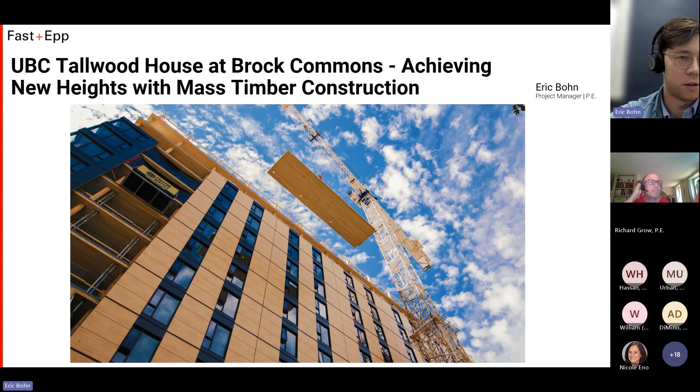Fast+Epp. We are structural engineers. I'm in the New York office. We have offices headquartered in Vancouver, Seattle, and Toronto, with 2 offices in Germany. We work with all materials in all sectors, but our expertise comes in timber and hybrid structures.

Here's quick bullet points of our specializations, and I will highlight these 4 highlighted ones in red at the UBC Tallwood project.

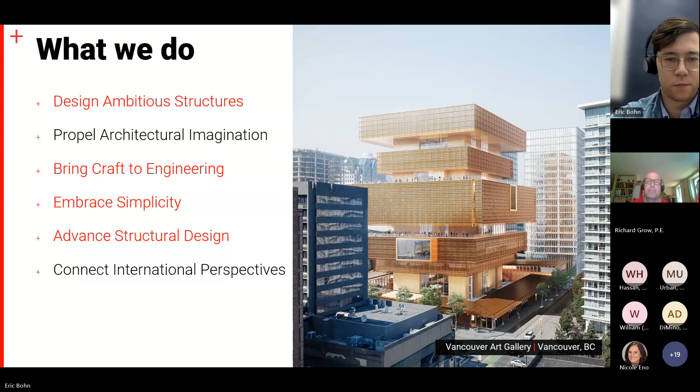Now to get into the project background. This is an 18-story student housing at University of British Columbia, Vancouver. It's 175 feet tall. It's 17 floors of 2-way point-supported 5-ply CLT. At the time, this was the largest application of point-supported CLT on a project in the world. It has a steel roof, all coming down on a concrete podium, transferring out on level 2. The lateral system is 2 full-height concrete cores. This was built in 2017, so before I joined Fast+Epp, but this has been a template landmark project at our company for future point-supported CLT projects that we've worked on.

A little quick mass timber refresher. This might be new to some people, or they might already know this. Cross-laminated timber, on the left, is a solid engineered wood panel consisting of several alternating layers of dried lumber boards bonded with adhesives to form a solid panel.

The CLT panels consist of odd layers, usually 3 to 7, with the outer layers going in the strong axis and the inner layers going in the weak axis.

Glulam is a stress-rated engineered wood panel, consisting of wood laminations, or lams, bonded together with durable, moisture-resistant adhesives to make a solid member. Glulam was used for the columns, and CLT was used for the slabs.

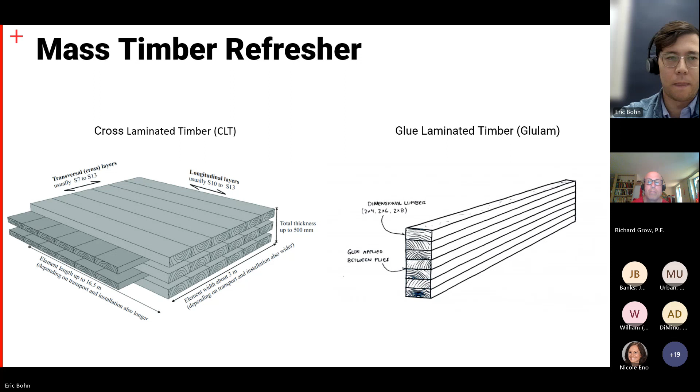Here's a brief timeline of the project. What I want to highlight is between December 2014, when the design team was selected, to October 2015 - this 10 months was the full design phase, so it was very quick.

The client had a very quick timeline for design and construction because they wanted it open for fall 2017. Once design was done, construction started in October 2015, and the superstructure portion was done less than a year later, ready to open less than 2 years from when design was completed.

I want to highlight that the design phase included site-specific regulation and code compliance that we had to work around, which I'll get into later.

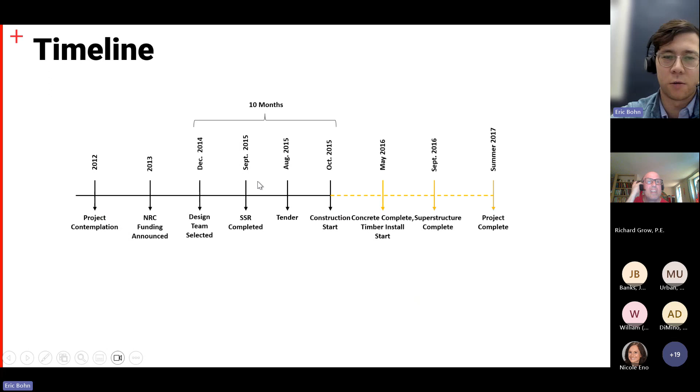This was possible due to external funding in Canada, mainly through Natural Resources Canada. This was because there was strong interest in promoting the wood industry in Canada, not just for sustainability but to build tall buildings - Canada wanted to be at the forefront of tall wood structures in the world. Following this, more funding followed in both the US and Canada.

Now I'll get into more design context for the project. It's located on the peninsula just outside of Vancouver - you can see Vancouver in the distance here. This is the campus of the University of British Columbia, and right here is where the project is.

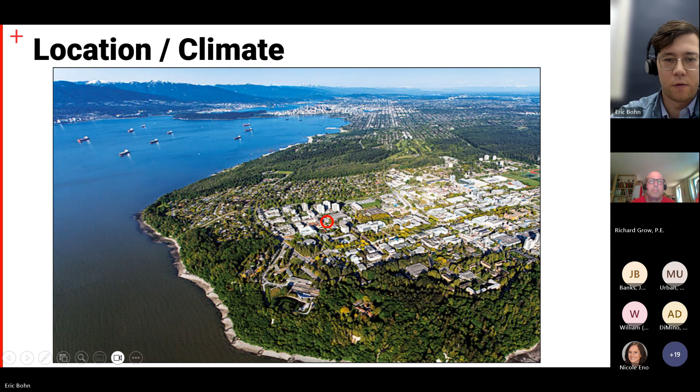It's on a hill close to the ocean, so you get wind loads from the escarpment, producing very high wind loads. It's also close to the Cascadia subduction zone, so it's a high seismic zone - in Canada, this is the second highest seismic zone after Victoria.

Being part of the Pacific Northwest, there's a ton of rain. This might not impact steel and concrete as much, but since timber is an anisotropic material that absorbs moisture, lots of rain can really affect timber's mechanical properties and its aesthetic properties.

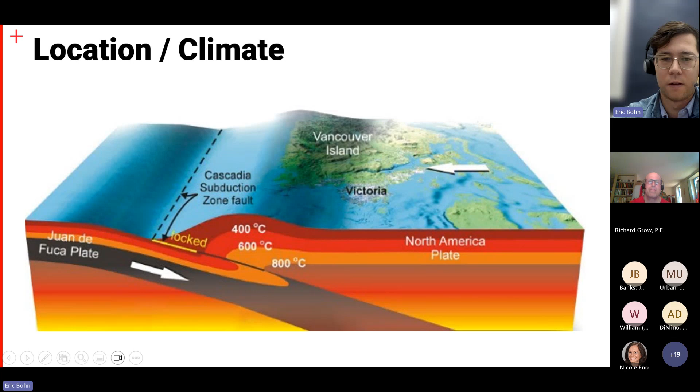The university had a building they liked - another student housing on campus made out of concrete - and the cost was $192 per square foot. So they came to our design team and said, we want student housing made of timber at this cost, $192 per square foot. From day one, this was really a driver to keep the cost at $192 per square foot.

For a unique and new project like this at the time, you had to find alternate ways to procure and go about the project - so not design-bid-build, but rather design-assist. It was very important to bring in suppliers, installers, and the GC during the design phase to get real-time feedback through design assist.

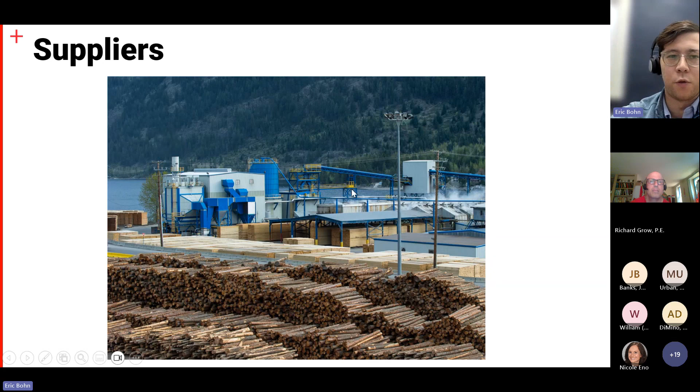British Columbia has a strong forestry industry with lots of supply, but at the time it mostly looked like these dimensional lumber mills. So at the time, there weren't many fabricators or producers for mass timber in British Columbia.

When considering suppliers, we needed to think about production capacity. Do these shops have enough output capacity to produce the volume of wood? Do they have the species that the design team is looking for? Do the panel dimensions fit the requirements of the project?

As a starting point, this is a rule of thumb we use at Fast+Epp for mass timber buildings, for post and plank, meaning beam, column, and slab: 0.25 meter cubed of wood per meter square of floor. Multiply that by the total area of the building, and the estimate was about 3,640 cubic meters of mass timber for this project.

The other thing to consider is the supplier's capability. Are they capable of producing a high quality product on schedule, and how long will it take? Today many mass timber manufacturers are backed up 6 to 8 months. You need to reserve your place in line, similar to a steel mill order. The design team knew CLT was a critical path and needed the suppliers to deliver.

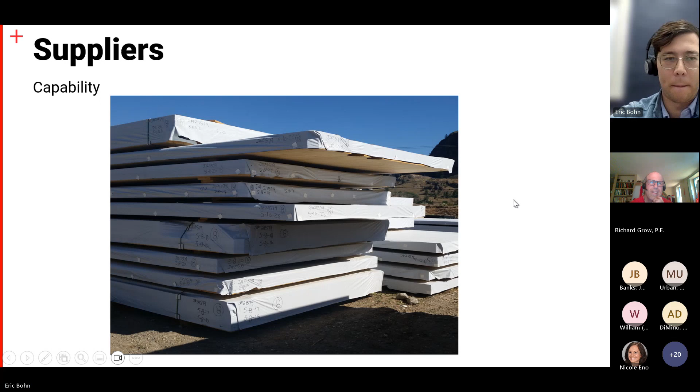Now on to design approach.

Keeping it simple was the overarching design approach for both this project and what we do at Fast + Epp. This was especially the case here because of the limited budget and accelerated design and construction timeline. The design team didn't want to be purists and force timber if it didn't make sense for cost and timeline of design and construction.

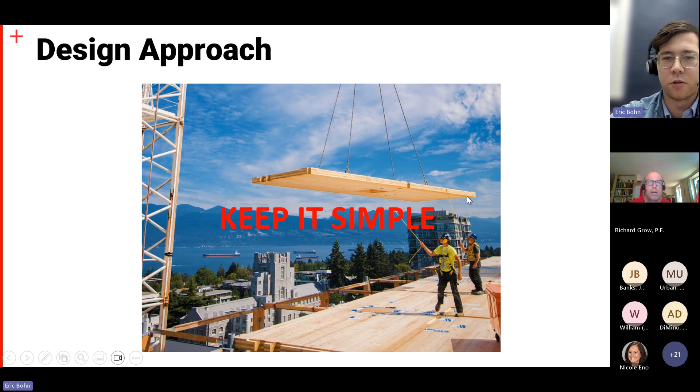Our design team wanted a flow and repetition of structural elements to facilitate fast construction. And since our design team was already being innovative with this being the largest application of point supported CLT, we didn't want to be too innovative beyond that.

With any design, you start in concept with multiple options. These were all the options explored early on, with 3 investigated in much more detail: 2 post and beam options and 1 flat plate point supported option. These 3 went through preliminary costing and discussion, and we decided on the point supported system.

Now we'll go into the building overview. This is the structural model. You can see the steel roof over 17 floors of point supported 5-ply CLT, supported by glulam columns. This all transfers onto a concrete transfer slab on level 2, with standard concrete pad foundations.

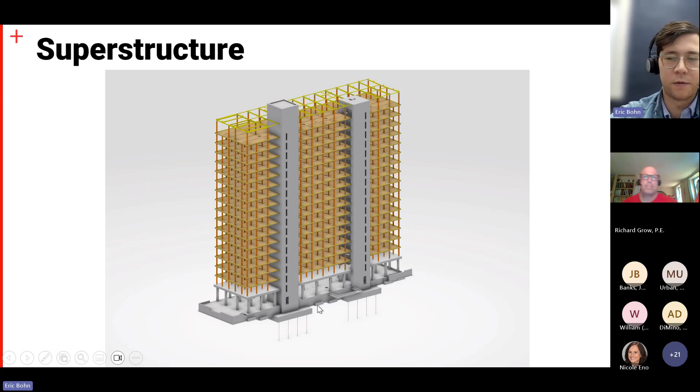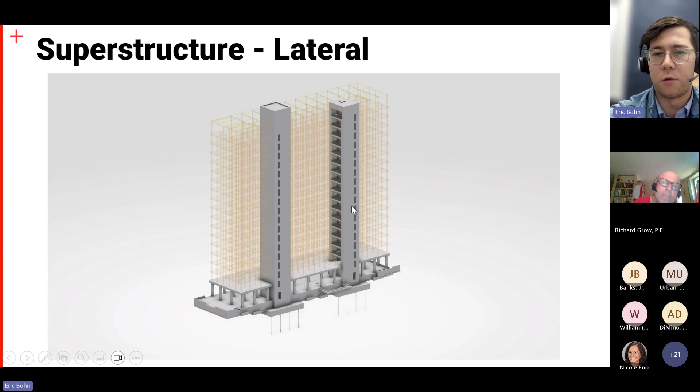The lateral system is 2 full height concrete cores designed as ductile reinforced concrete walls. A lot of people ask, if you're making the gravity system mass timber, why not make the lateral system mass timber too? In this high seismic zone, it was actually technically feasible to do a CLT core wall. However, the client didn't have the appetite to invest the resources or time in seeing if this would work, so we went back to our keeping it simple approach and just kept concrete core walls. Our design team also didn't think we would get approval from the site-specific regulation if it was CLT cores on top of point-supported CLT.

Here is a rendering highlighting all the timber elements. As you can see, this is a majority of the building.

This is the architectural layout. We have 2 quads at the ends, and this is an isolation view of the quad unit. In between the quad units are multiple studio units, shown here in isolation as well. Working with this layout, we typically wanted the short distance between columns to be the panel width in the demising wall.

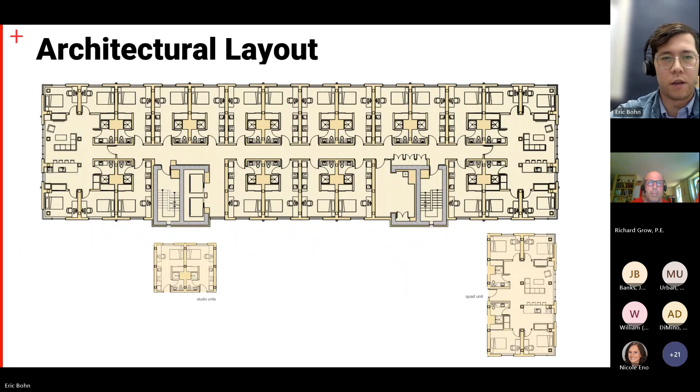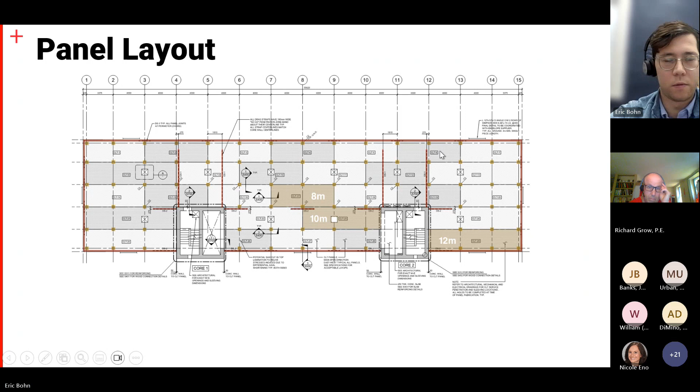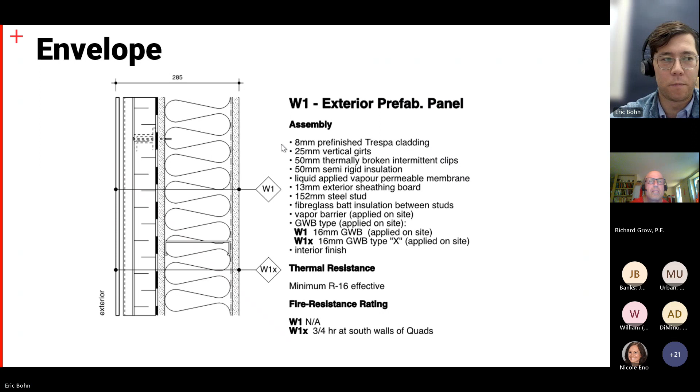Now I'll get into the key analysis and design challenges our design team faced. As I mentioned earlier, due to the height limitations of the BC 2012 code limiting buildings to 6 stories, we were out of code with this. However, UBC is a unique single legal entity that allows it to essentially operate as its own small municipality.

This allowed the design team to go to the British Columbia Building and Safety Standards Branch and create a site-specific regulation, SSR, which is its own document for this specific site and project, interpreting the code to make an exemption for this site. Our design team drafted a document called the UBC Tallwood Building Regulation, which ultimately exempted this project from the BC height limit.

However, this required an extensive peer review process from structural engineers, fire safety engineers, building officials, timber scientists, and construction specialists to determine if this was acceptable. This was our path to finally get the building permit, and it was all done within that 10-month design period.

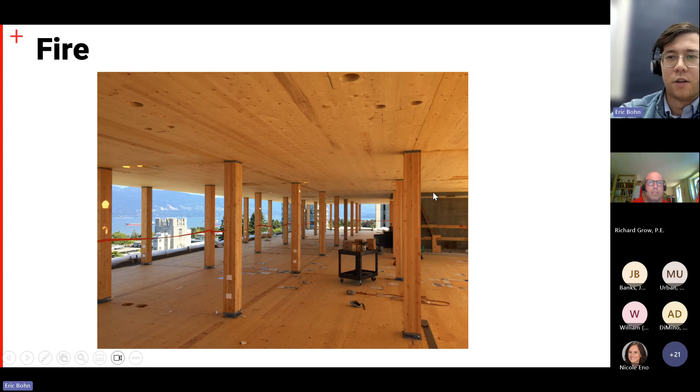Now I'll get into the details about the fire aspect of mass timber. A lot of people ask, you're making a building out of mass timber, why not expose it? However, the design team had to go and cover it up, and I'll explain more about this.

In order for our design team to get approval from the province, they thought it wouldn't be possible to push through point-supported CLT as an innovative step while also having everything fully exposed, especially given the knowledge, research, and fire codes for mass timber back in 2014. So our design team decided to use drywall for full fire protection, which was a conservative approach to get code compliance approval. Obviously, many years later, the code has caught up and can now design for exposed wood. This project was a big catalyst for that.

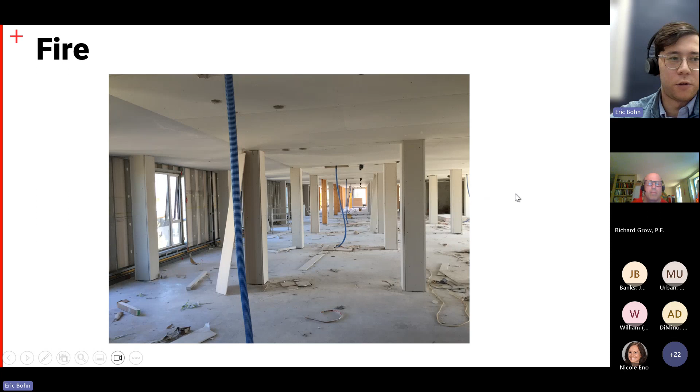I'll do a quick side note about how to design for exposed mass timber. It's through an established method called charring, where mass timber elements burn at a predictable rate of 1.5 inches per hour, creating a gray char layer around the unburned portion of the wood. You design an exposed wood element with a reduced char section for the fire hourly rating of the building.

Our design team didn't do this, as I mentioned before. If you do it this way, you need to pay more for the columns due to the increased thickness needed to account for the reduced char dimension. So instead, our design team wrapped the columns with 3 layers of type X gypsum. The benefit was that it allowed smaller section sizes for the columns and the use of non-visual grade wood since it would be covered up.

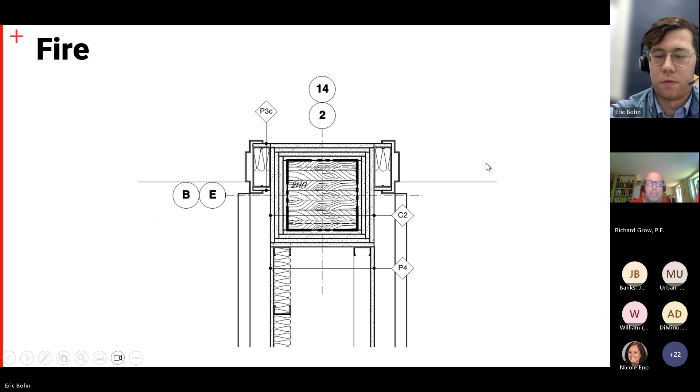Here's the typical floor assembly of the project. Starting from top down: floor finish, concrete topping. This concrete topping was more of an acoustic layer, and today it can also be used as a fire separation layer. Below that we have our 5-ply CLT, then our moisture resistant partition, GWB type X board, followed by a hat track, and then 2 more layers of that fireproofing GWB type X. That's for the 2-hour fire rating.

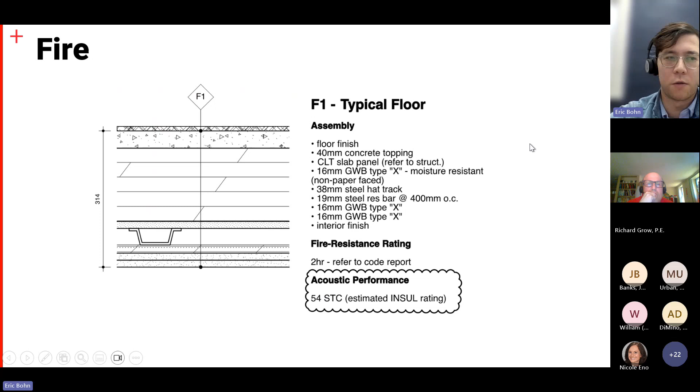Now I'll get into the details of the point-supported CLT system. This is essentially the gravity system: 5-ply CLT spruce panels on glulam columns from Structurlam in British Columbia. This was the largest application of point-supported CLT at the time, and it's very efficient, similar to concrete flat plate, because there are no beams, thus no horizontal obstructions to MEP. This keeps the floor-to-floor thin and saves on envelope sizes.

Similar to concrete flat plate, CLT can span two ways here. In the long direction, this is the strong axis direction of the CLT, and the short direction is weak axis spanning with transverse layers. So it's very analogous to concrete flat plate, as I mentioned.

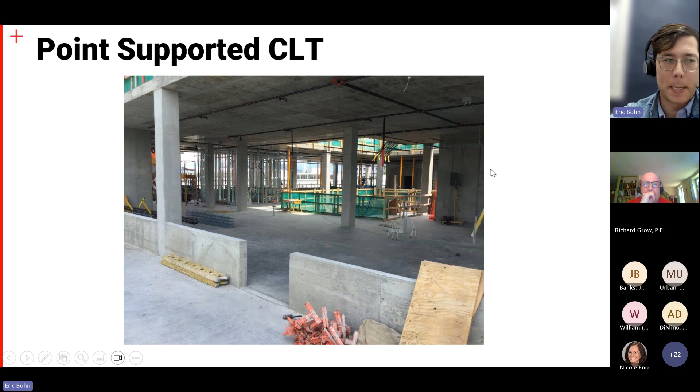A key design aspect of concrete flat plate is punching shear, as many people know. Similarly, in point-supported CLT, design is governed by a phenomena called rolling shear. This is where the wood lamellas try to roll over each other. Imagine a stack of straws on top of each other, and as you try to shear them across each other, the straws in the back try to roll over the straws in front of it.

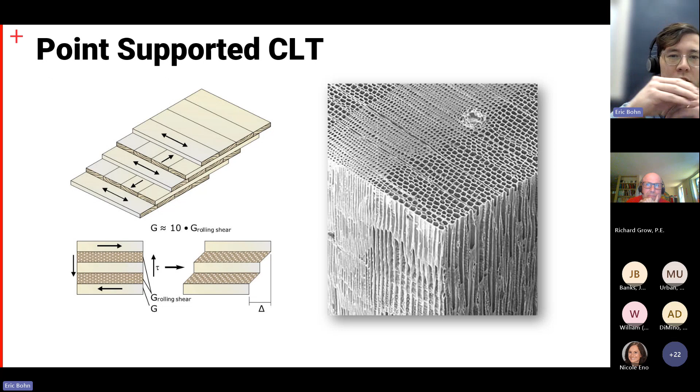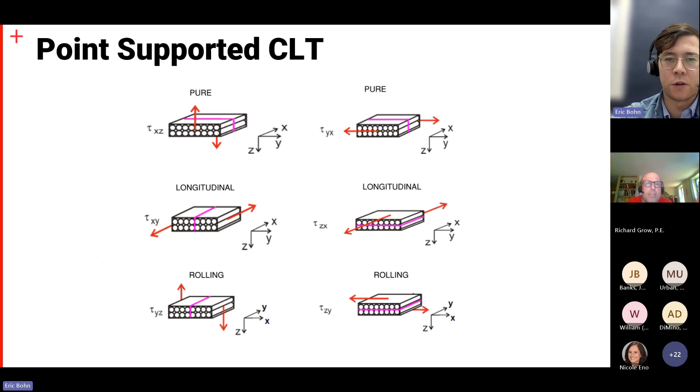So this really controlled the design. The current design code at the time specified rolling shear capacities for CLT to be 1/3 of the longitudinal shear capacity.

We used hand calculations and a software called Dlubal RFEM. This software has an add-on called RF Laminate, which we used because it allows you to input and analyze CLT, specifying the layers and their properties. It even has layers and CLT products from many manufacturers worldwide.

However, because this was the largest application of point-supported CLT, our design team wanted not just software analysis and hand calculations to validate design, but to do our own research as well. This is a simple hand check procedure we did. Without getting into too much detail, it's based on first principles to calculate rolling shear stresses on the perimeter of the columns, checked against the code prescribed rolling shear stress of 0.5 MPa for this CLT panel, which is about 75 PSI.

Again, this is 1/3 of the longitudinal shear stress capacity.

However, our design team also wanted to do full-scale testing to verify our assumptions. So 18 panels were tested from 3 prospective suppliers at FP Innovations Lab in Vancouver, British Columbia. Through this test, rolling shear capacities were in fact higher than those published in the code. Our team, along with a lot of other follow-up research, has dove into this more, which I'll go into later.

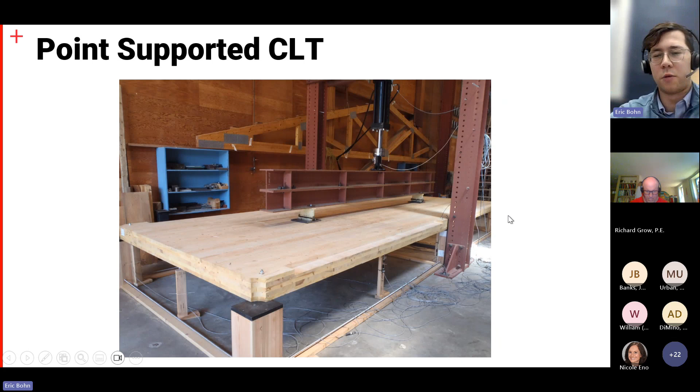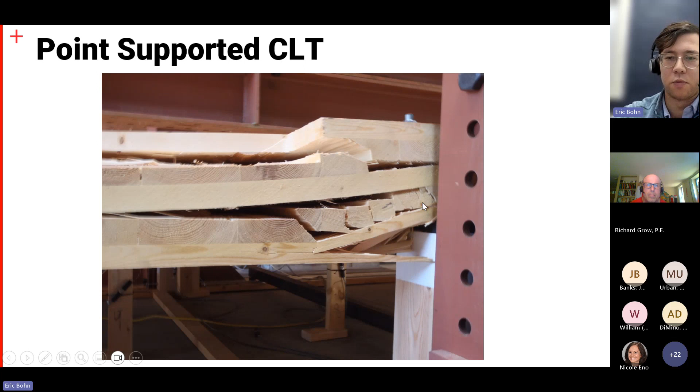Another major part of the gravity design was the column-to-column connection. We wanted a direct load transfer from the column above down to the column below, while also giving enough bearing area for the CLT on that floor to rest on the column below.

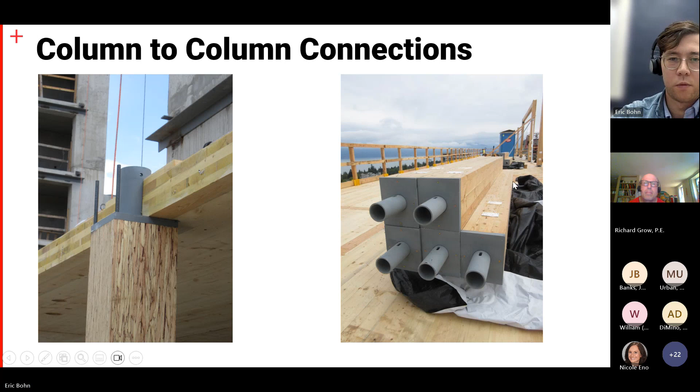The concrete core was constructed before timber even started, and so it allowed a lot of this Delta 1 to occur even before the timber columns were erected. So the design team didn't need to account for Delta 1 in this calculation.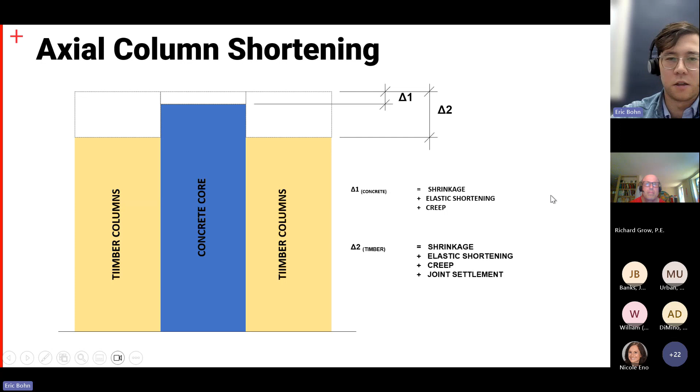Overall, the axial column shortening of these timber columns was estimated to be about 48 millimeters, or 2 inches, at the top, at the roof. So the design team had to decide how to mitigate this, how much to mitigate, and where to do it.

So this is an example of the solution here. Basically it's a series of shims installed at the top of the column-to-column connection. This was installed at a higher elevation than the theoretical design datum and higher than the CLT to concrete connection elevation, so that at some time later it will all even out.

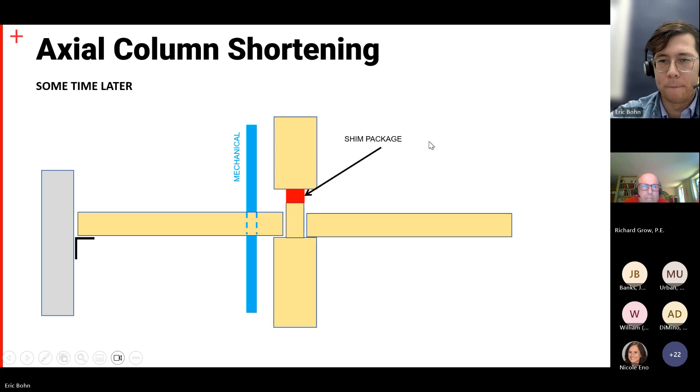As I mentioned, they didn't want to overcompensate the settlement, so due to many uncertainty factors, and this being the first biggest application of tall timber and CLT, they only shimmed for about 50% of the calculated settlement to avoid overcompensation.

Here are some of the lateral design properties. These are ductile coupled reinforced shear walls, and using a large R value was able to reduce the lateral load. The big thing was how to get the diaphragm load from the CLT plates into the concrete cores.

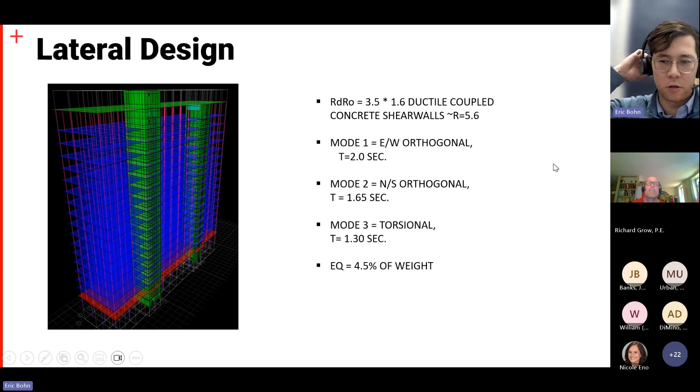As expected with this building, since it's made of CLT, it's much lighter than the equivalent concrete building, so the seismic forces were much less. This led to savings in concrete core sizes, foundations, and lateral elements.

As with any project in a high seismic zone, you want to do it by capacity design, which is what we did here. So you choose your yielding mechanism, which is the concrete base of the concrete core, and design for this to yield first, with nothing else yielding before that. So you design the other elements, the diaphragms, to the capacity of the yielding concrete core.

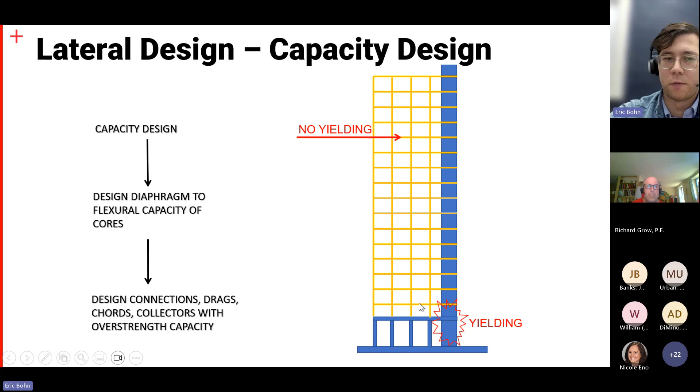As expected, this led to congested reinforcing in the core walls, detailed using the special reinforcing criteria per the codes. And the closer the design is to the loads, the more efficient you can make the diaphragm.

This is a typical detail of our plywood spline connecting between two CLT panels for diaphragm transfer. Basically, the top side of the CLT panels is indented on both sides so you can put in a flush plywood spline and screw them in.

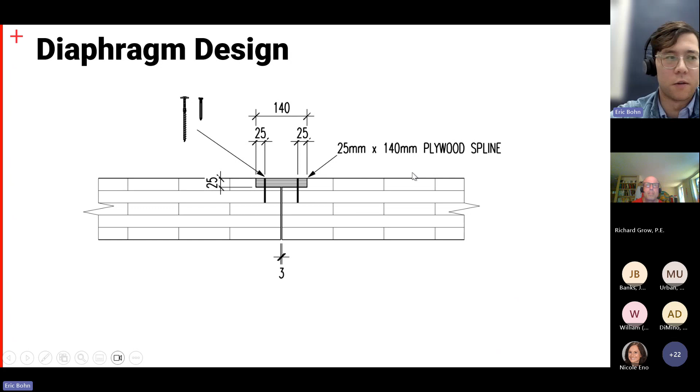This is what it looks like in action. You can see the larger nails at larger spacing are for connection fit-up, and the smaller nails are for diaphragm shear transfer. These nails were chosen, Rothoblaas anchor nails, because you could use a pneumatic nail gun to screw them in, which would speed up construction significantly.

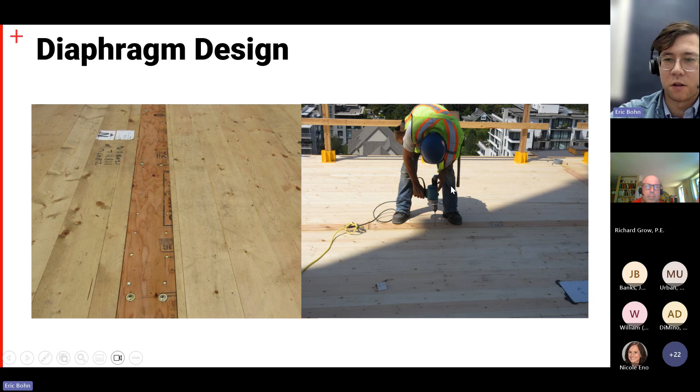As you'd expect, there are large diaphragm forces that need to get into the concrete core. So we used a series of drag straps here, which are essentially steel plates screwed down to the CLT and connected, either welded or bolted, to an embed in the concrete core wall.

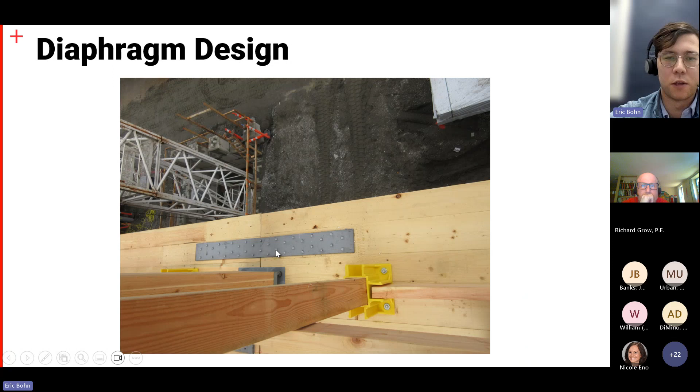Along the perimeter of the CLT diaphragm, to transfer the diaphragm chord tension across the panels, we used, similar to drag straps, steel plates screwed down on either side of the CLT joint.

As with any tall building, wind can produce dynamic wind accelerations, and these vibrations might cause uncomfortableness for occupants on the top floors. So we had to figure out a damping value to use. However, since this was a new tall building made of wood, there wasn't much research or precedent on this. I think FP Innovations was doing research at the time and suggested using 1.5% damping for this.

In this project, prefabrication was a big component of the success. This was the benefit of having the GC, timber supplier, and multiple trades on board during design assist.

I know this is pretty common nowadays, but this was pretty new at the time in 2014-15, where the design team included a virtual design and construction modeler, which was CAD Makers. They basically made a full 3D model, including all the trades, to assist in design development, decision-making, clash detection, coordination among disciplines, and even construction sequencing.

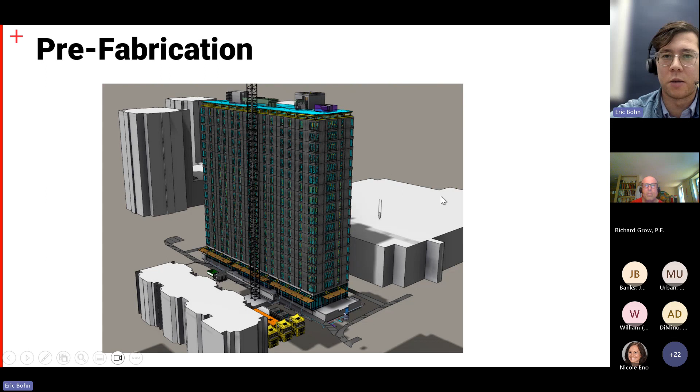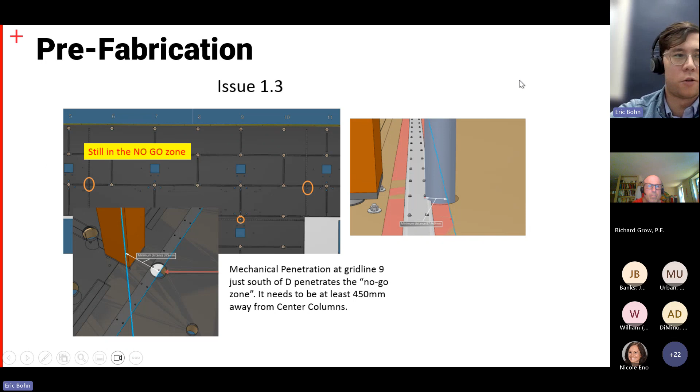Clash detection - a lot of this happens in either late CD or CA, but the goal here, because of the really tight construction timeline, was to get this done all in design ahead of time to prevent any headache and hiccups in construction. This was also done so these models went straight to Structurlam, and they could start producing high quality, precise panels with the right openings in the right locations.

This also allowed the tight tolerances that our design team was achieving: 1 millimeter for the timber elements and 0.5 millimeter for the steel.

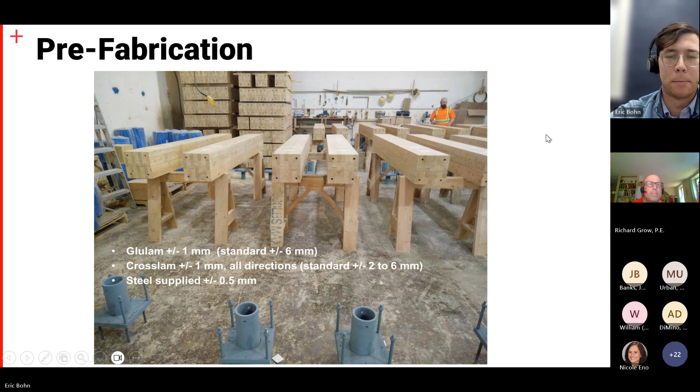Now I'll go into the construction portion of the project.

You can see here there were 3 different types of column-to-column connections: the steel-to-steel one, and 2 wood or wood-to-steel column-to-column connections. Based on the feedback from the construction team, we decided that the steel one was the easiest to construct.

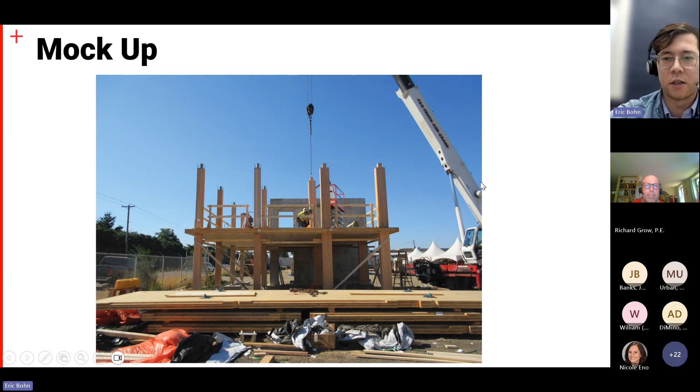Through this, there were many lessons learned, and we were able to validate design and update details to make the final set of construction documents.

Different facades were tested, so we have precast sandwich panels, wood studs with metal panel, and steel studs with metal panel. This latter one was the one chosen.

In terms of sequencing, the entire concrete was poured and done during the winter, wetter months. This was to facilitate the use of only one crane allowed on site because of the tight space on site. This allowed, while the concrete was being constructed, for the timber to be fabricated in the shop, and then for the timber to be constructed during the summer drier months to avoid any moisture from rain impacting and delaying the schedule.

This provided a 16-week window for the construction team to assemble.

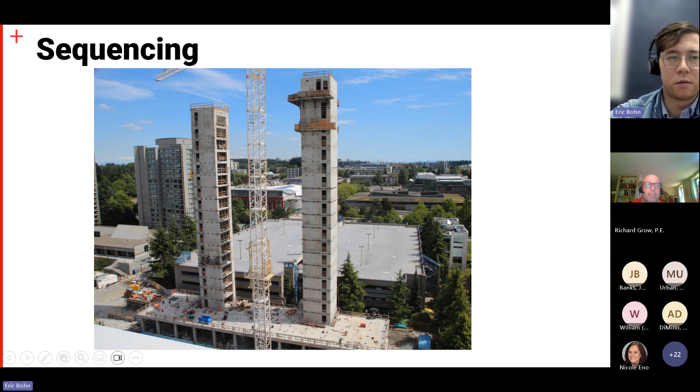This is a typical level of the building superstructure, and I will go step by step of how each individual element was installed.

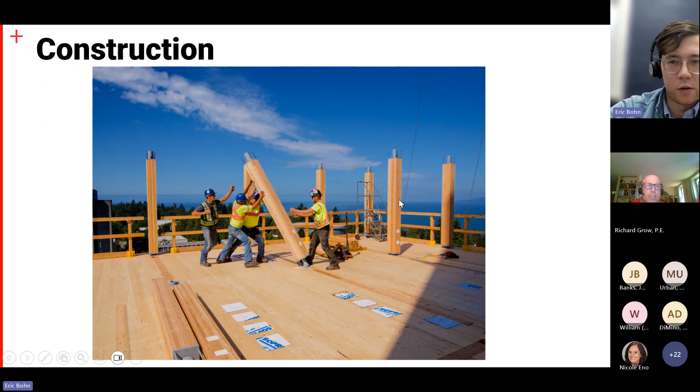Start with columns on site. You lift them in place into the column-to-column connection below, followed by temporary horizontal spreader braces and diagonal bracing to keep the columns from rotating and tilting.

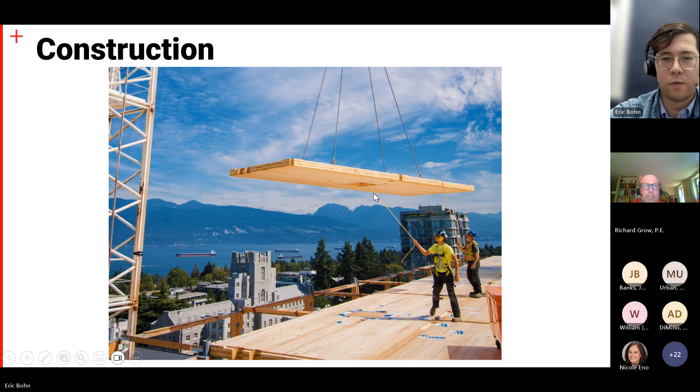Once all the columns are plumb, stabilized, and in correct location, the CLT gets lifted and fit up into place, connected to the dowels, bolted down at the corners at the column connections.

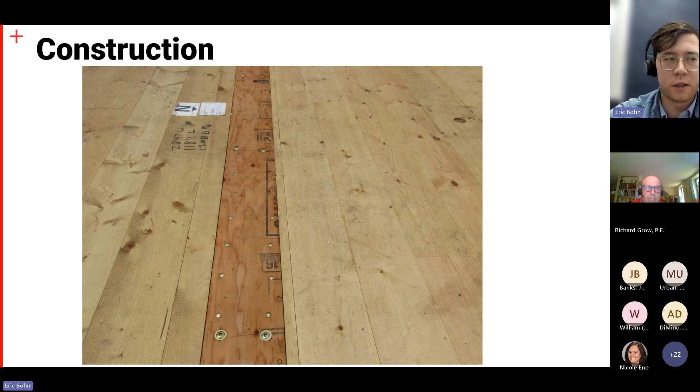Soon after, someone behind comes and installs all the splines between the CLT panels, along with the drag straps, and connecting the steel drag strap into the concrete core.

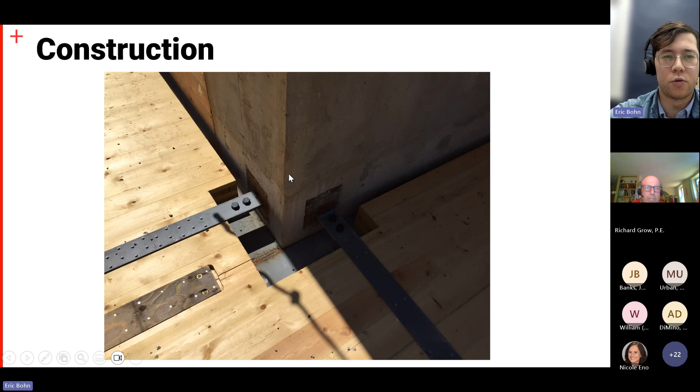Temporary railing gets installed, and also the perimeter facade connection angle to CLT so that the facade could connect right here and hang below.

Anywhere between 1 to 3 floors behind is where they started, this is about 3 floors behind, but they were able to catch up the facade installation to only 1 floor behind once they got the hang of it. The facade would get lifted into place and connected to these perimeter steel angles hanging from the CLT slab above.

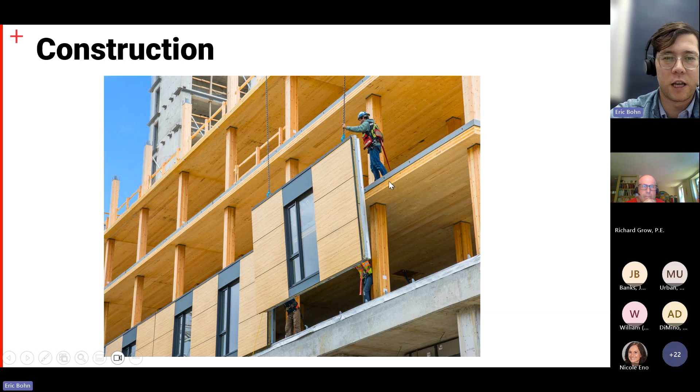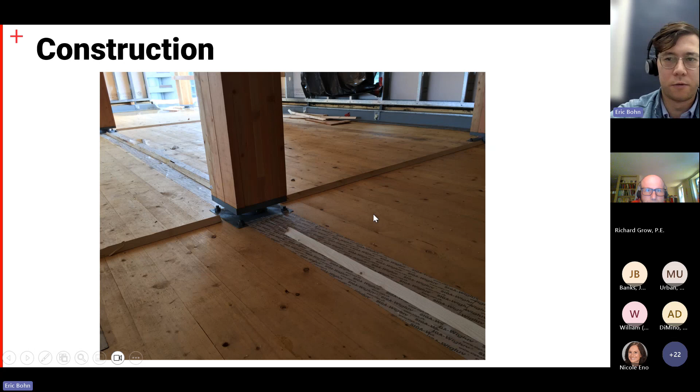Soon after, you protect the splines and the slab to prep it for a concrete topping pour. Once that's prepped and that floor is enclosed by the facade, you pour the concrete.

But before you pour the concrete, you want to moisture test the CLT and ensure it's below the criteria. Otherwise, if it's above the criteria, the CLT can trap, the concrete can trap that moisture in the CLT, and it'll be very difficult to get it out. So it's very important to ensure that the CLT is at the right moisture content before it's enclosed and the concrete is poured.

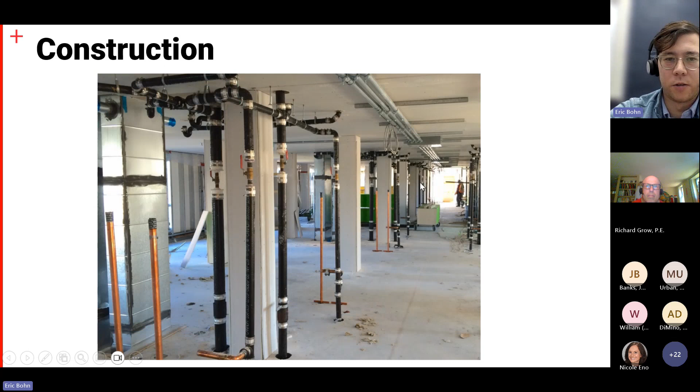Once the concrete is poured, fireproof gypsum type X board can be installed, followed by mechanical fit out, and interior fit out can proceed.

So here's a quick time lapse of the building. I don't think I'll go through the whole thing, but all in all, this timber portion of the project went very smooth. Obviously, the beginning floors took a bit to get used to, but we think the mock-up really helped in getting the construction in order and fast from the beginning.

The construction team was able to do this within a 16-week period. They actually did it in 9 weeks, 44 working days, so essentially 2 months ahead of schedule. This really showcases the speed of mass timber construction.

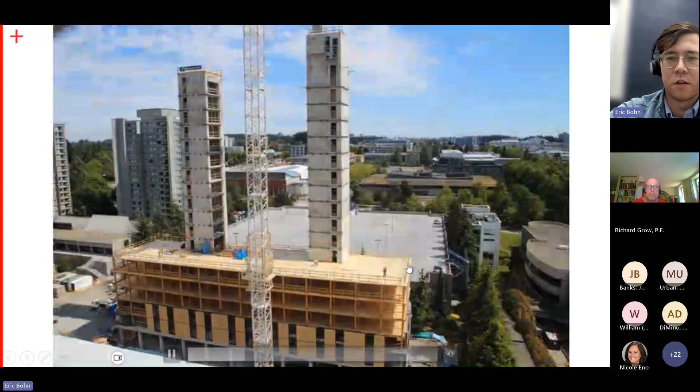If I can skip a little. But yeah, it went up very quickly, and you can see the facade catching up over time to the CLT.

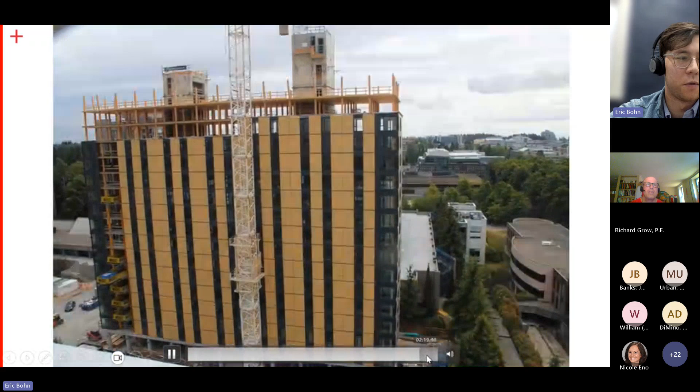Wrap up with a conclusion here.

If you remember my first slide, or one of the first slides in procurement, we were expecting about 3,600 meters cubed of wood. This was based on the post and plank rule of thumb volume that we had per square meter measurement, and we achieved a much lower wood volume. This is because we were point supported without any beams.

The cost of the project, remember, our design team was aiming for $192 per square foot. It went up to $232. If you include inflation, this was about a 7% premium.

Timber install went up fast, and that was a huge success. We expected the drier months in the summer to rain a little, but it rained a lot. That's why it's very key to construct quickly and cover up the CLT to protect it from moisture. Our design team was able to achieve the high tolerances we were aiming for.

So some lessons learned from here. Point supported CLT is an efficient system for student residences, micro apartments, or hotels. However, in today's CLT markets with more suppliers and more production, wider panels are possible, which allows for more flexibility in unit layout, becoming more efficient for other residential apartment buildings.

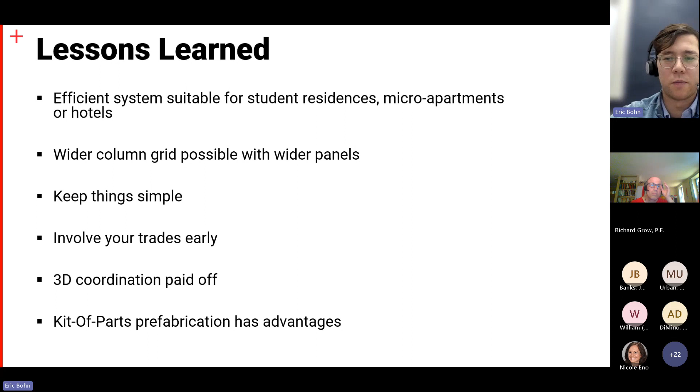That full-scale mock-up was really successful as well in testing out connections and testing out construction and fine-tuning the design. With mass timber, the kit of parts prefabrication has its advantages, using a repeated puzzle-like system that can be easily and quickly assembled on site.

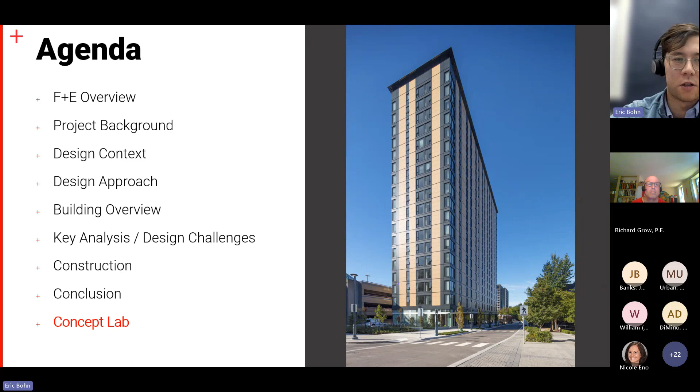So now I'll spend a few minutes on our concept lab, which is our internal research and development arm at Fast + Epp. As a company, we try to be innovative and at the forefront of structural engineering, especially with mass timber. We want to push the boundaries of code since there isn't much code about mass timber. In the past, when we tested with universities or organizations like FPInnovations for Brock Commons, there were usually long wait times, it was expensive and difficult to get an answer. So our company decided, why not just create our own testing and research space in our home office, since we like it so much anyway.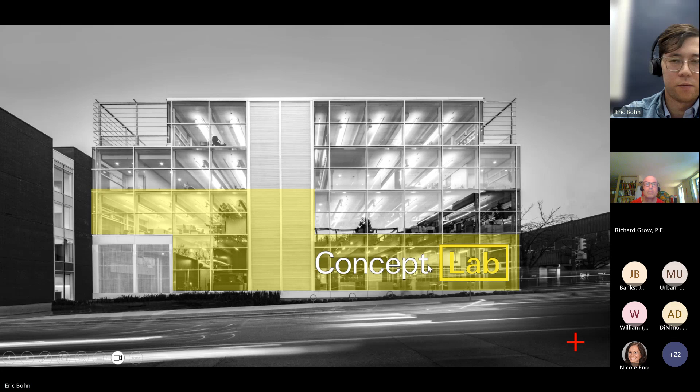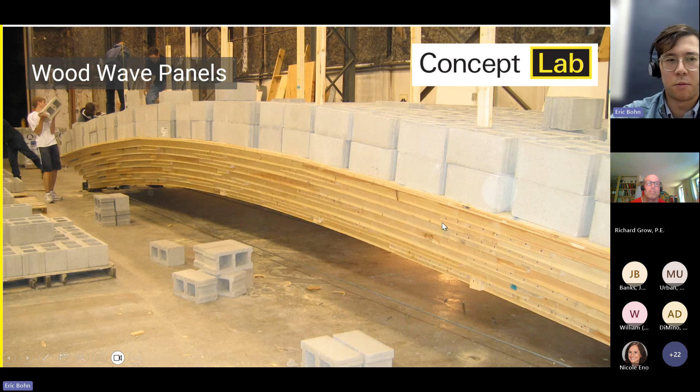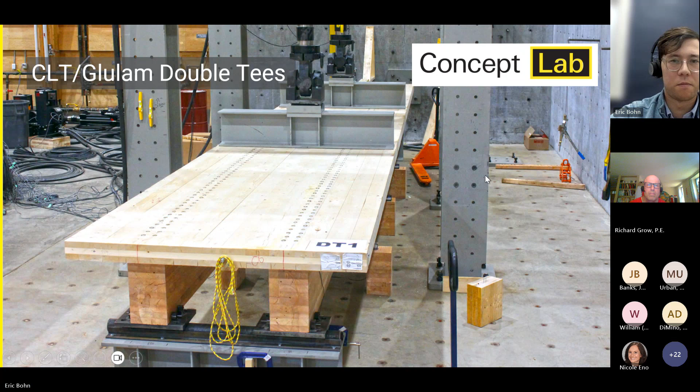I'll flip through just a few of the many tests we've done. This is testing different types of wood geometry and members by stacking weights. We also test different connections, like glued-in rod testing by hanging weights. We check composite members, such as this CLT glulam double-T, connected between two to create a composite member, similar to analyzing a concrete T-beam. And there's CLT shear wall testing and its connection to the base structure below.

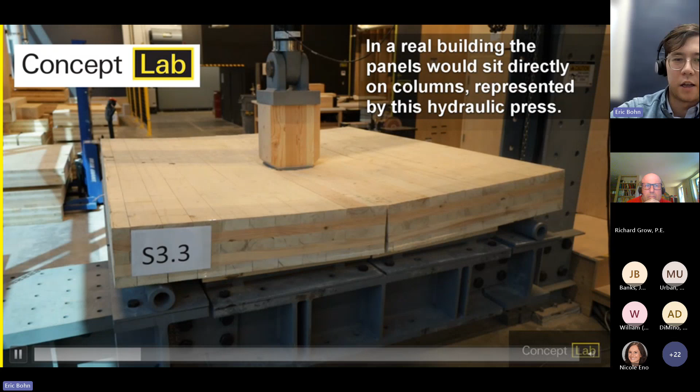And then obviously I want to highlight this. Since UBC Brock Commons, we did a lot of point-supported CLT testing on our own. This UBC Tallwood point-supported CLT work gained traction among not just us, but multiple researchers. Our company has done a lot of papers and presentations on this.

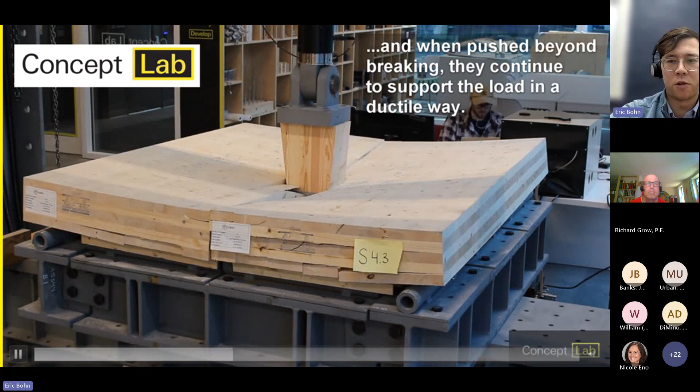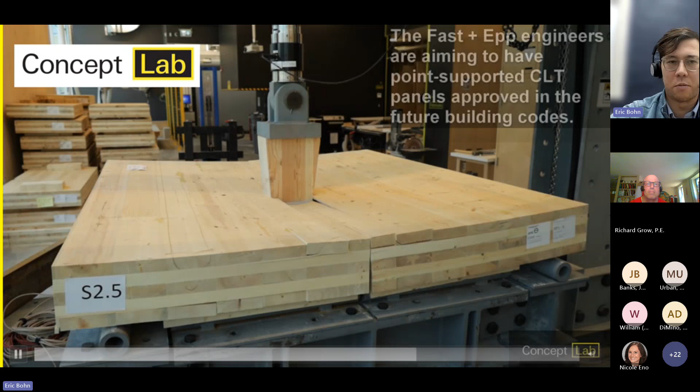Since then, further research suggests that the size of openings, the size and shape of the column, and the relative stiffness between the CLT and the column all play a factor in calculating the force and capacity in point-supported CLT. We have ongoing research right now, it's still not finished, and our goal is to get it into the building codes.

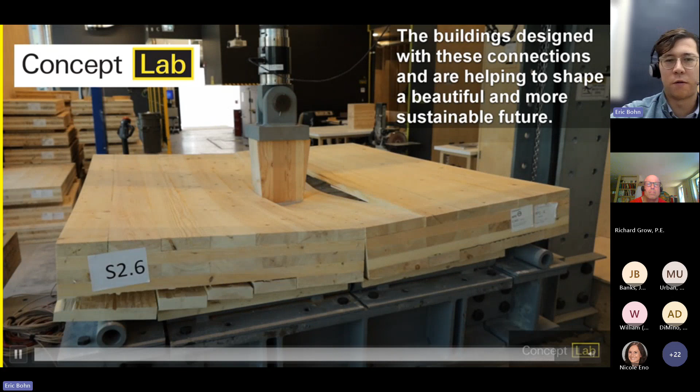With our ongoing research, we're still evolving from there and applying it to current and future point-supported CLT projects, such as BCIT Tall Timber student housing in Burnaby, British Columbia.

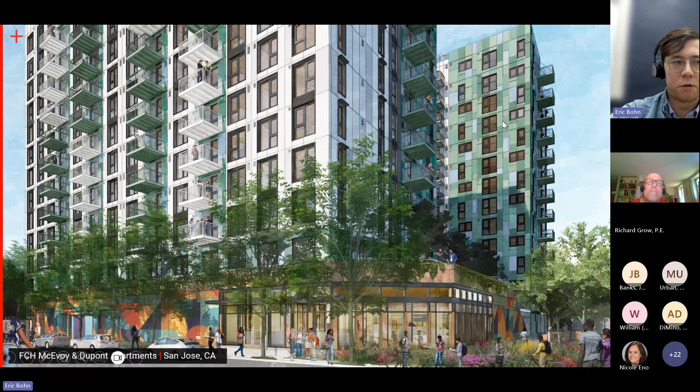Also some apartments in San Jose, California. Again, this is point-supported CLT on glulam columns. The lateral system is steel cores, all on a concrete podium.

And I'm currently working on a point-supported CLT project outside DC in Maryland, and hopefully there'll be more popping up on the East Coast. Thank you for your time.

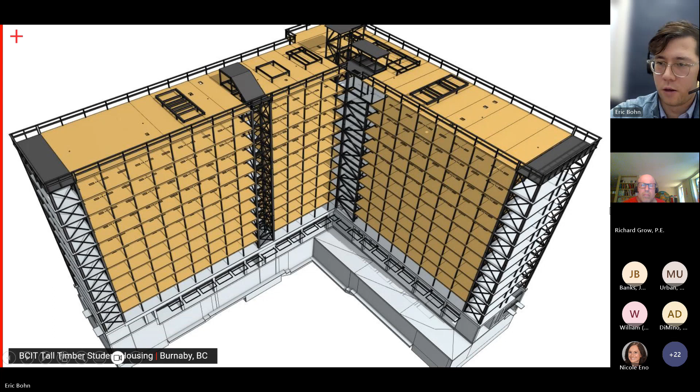Were the column shims on specific floors? Yes, for this project it was only on, I believe, 7, 9, and 11. I honestly can't remember why they decided on those specific floors, but in all our projects now we provide them on every floor, less shims on every floor. Over time that system didn't work as well as we wanted, so we used it on every floor, and that's a much better system.

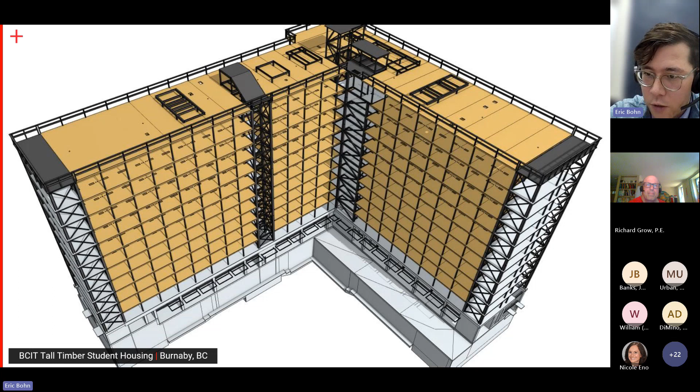Next question: was wind effect an issue at all being on a peninsula with significant exposure? Yes, let me go back to that. This was a light building, so the first few modes had a very low frequency, making it very susceptible to accelerations at the top. It was designed to 1.5% of gravity acceleration at the top, and they had to do their own dynamic wind acceleration models for this specific analysis.

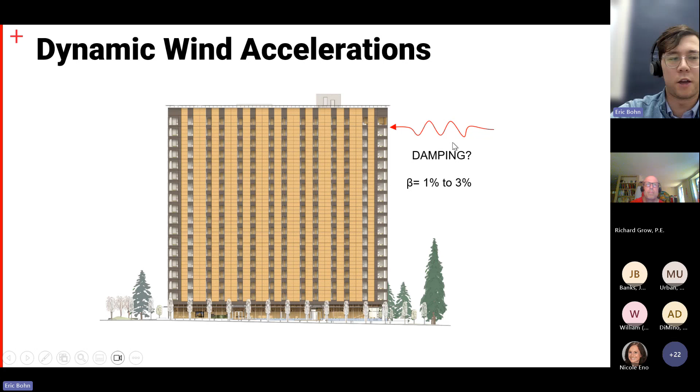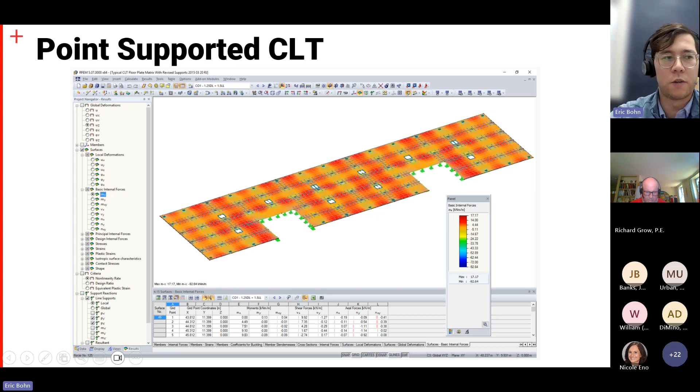Next question: what kinds of programs were used for analysis? For the lateral analysis it was ETABS, and for gravity it was RFEM, which we use solely for CLT and mass timber because it has a lot of mass timber functionality built in. There's an add-on called RF Laminate where you can create your own custom CLT layups, inputting your longitudinal layers, transverse layers, and mechanical properties if it's a custom layup. It also has many manufacturer layups built in, so you can select something like a Structurlam CLT layup from its database and analyze it directly.

Next question: what type of owner approvals or other validations are typically required for timber connections that are not typical or conventional? I don't think the site-specific regulators were as worried about the specific connection types. I think they were more concerned about fire safety, whether it would be safe in a fire event. That's why these connections still had to be fully covered and fireproofed to prevent any chance of fire damage to the connections.

I think I answered all the questions in the chat. If anyone else has any questions, I think we're also close to time anyway. Yeah, I think that's perfect timing, so I will just share my screen real quick.